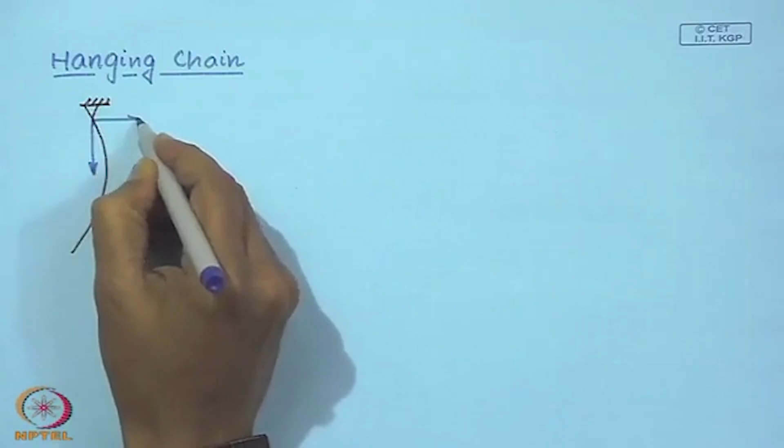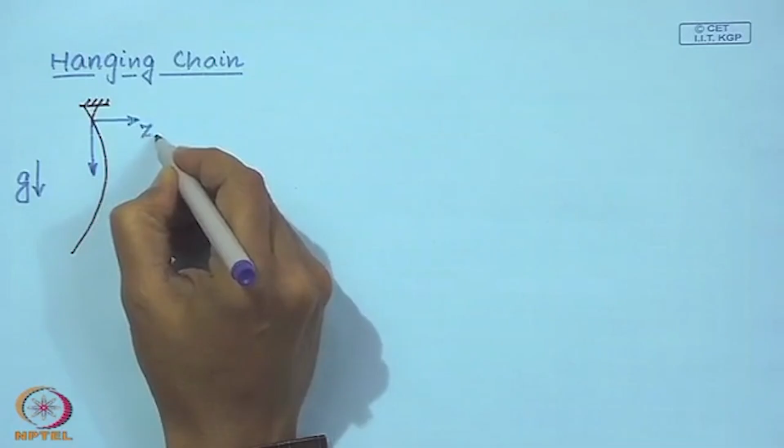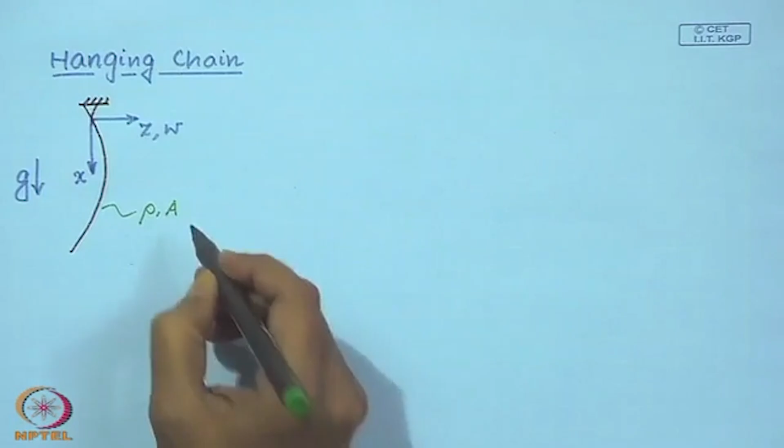So, let us consider this chain hanging in a uniform gravitational field. So, we assume that this chain is made of a material of density rho, has a constant area of cross section A, has a length L. Now, this is an inextensible chain.

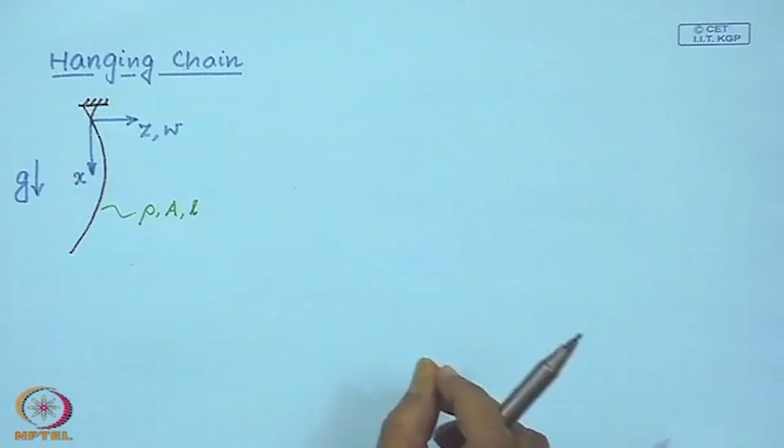So, though it does not in a way resemble a string in that sense, which is a one dimensional elastic continuum, this is inextensible. Yet, as we will see very soon, the equation of motion, at least up to the linear order, is similar to that of a string. So, we are going to write down the energy expressions.

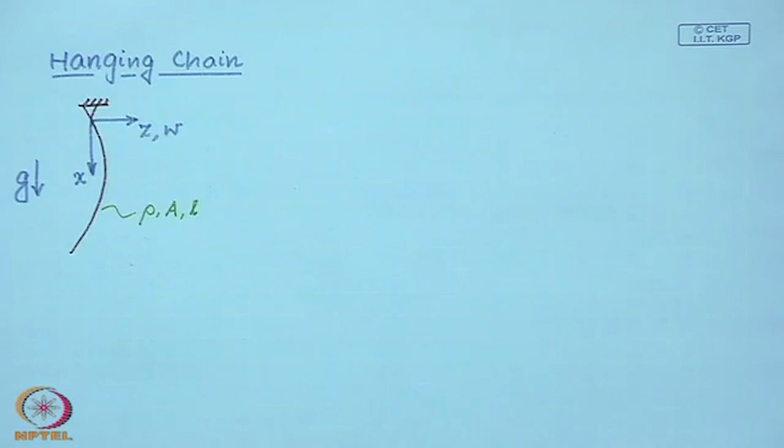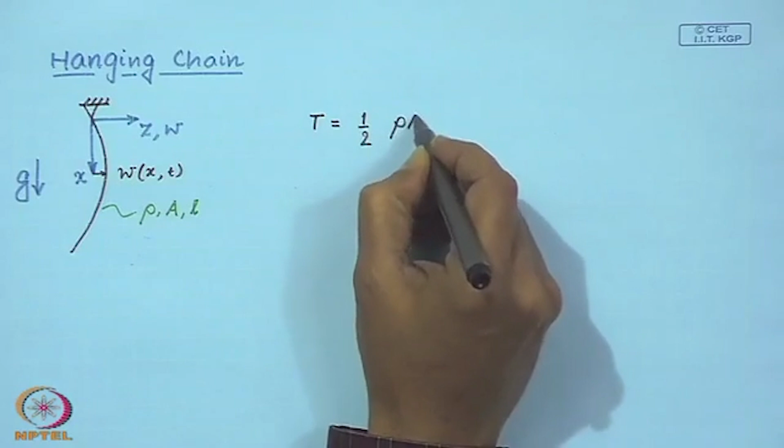So, the kinetic energy. So, at any location x, our field variable is w(x, t). So, the kinetic energy of an infinitesimal element can be written as half rho A dx, which is the mass of the infinitesimal element, and velocity square. So, if I integrate this over the length of the chain, then what I have, this is the kinetic energy.

Now, the potential energy of this chain. Now, why does this chain restore back to its vertical position? It is because as it deflects or as it is disturbed, the potential energy of the chain changes. So, it increases. Now, to calculate that, let us look at a small element of this chain.

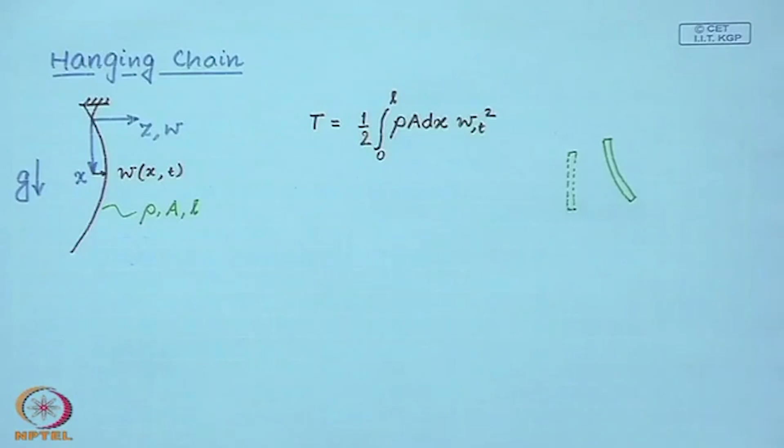So, this is the undeformed configuration of the chain, and this is the deflected configuration. So, this infinitesimal element had a length dx.

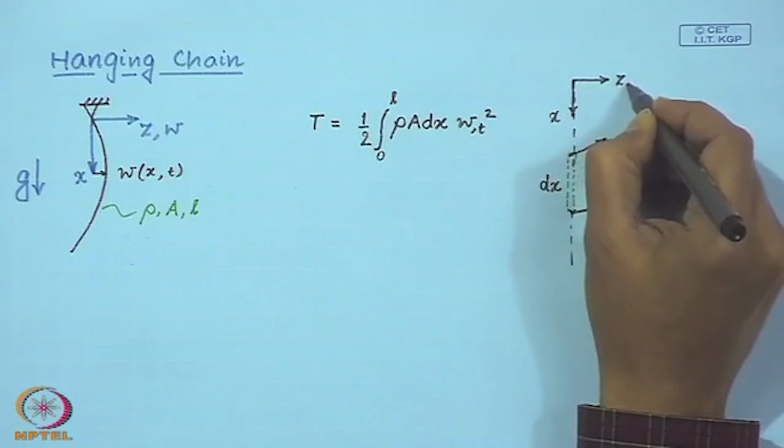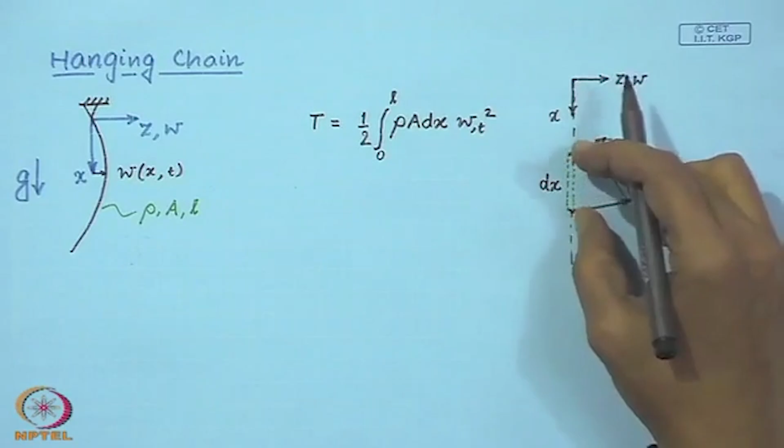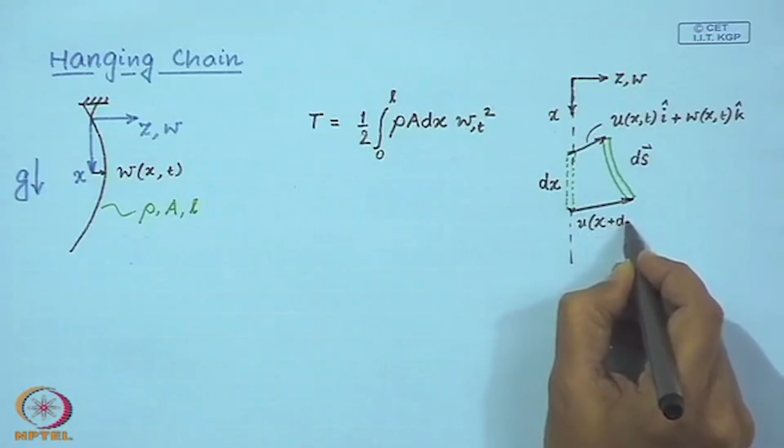Now, since this chain is inextensible as we have assumed, the length of this infinitesimal element in the undeflected or equilibrium configuration is the same as in the deflected configuration. So, this is also dx, but now this is deflected. So, I will represent it as a vector whose magnitude is dx, and these vectors I will represent this way, and this vector at x plus dx is given by this vector.

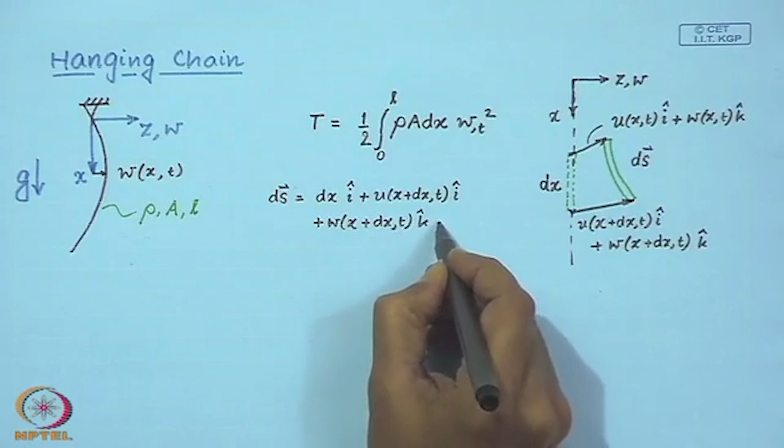So, if you write out this vector equation, we can represent this ds vector in terms of the deflection of the chain.

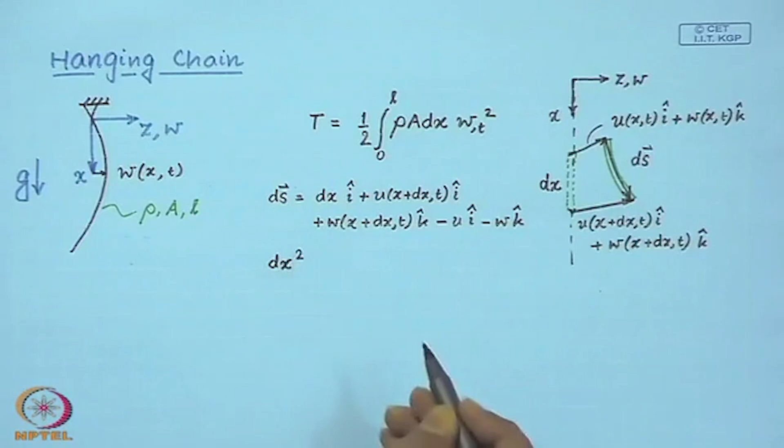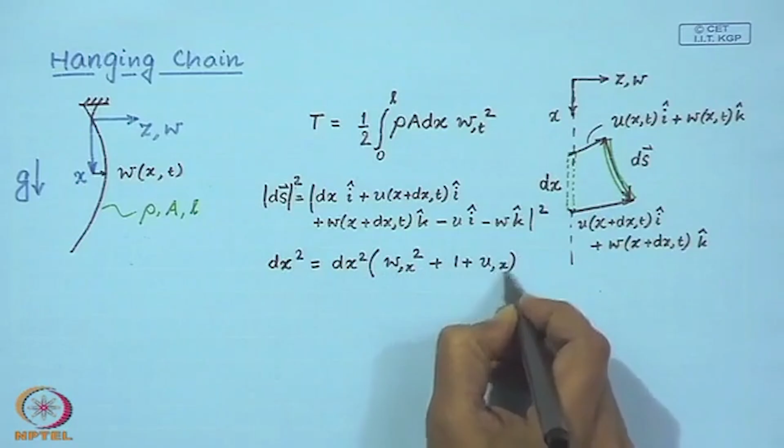Now, if you take the magnitude of the vectors on both sides, then as I mentioned, the magnitude of this is still dx because the chain is inextensible. So, what I will do is I will take the magnitude square, let us say, and if you simplify the right hand side, we have this expression.